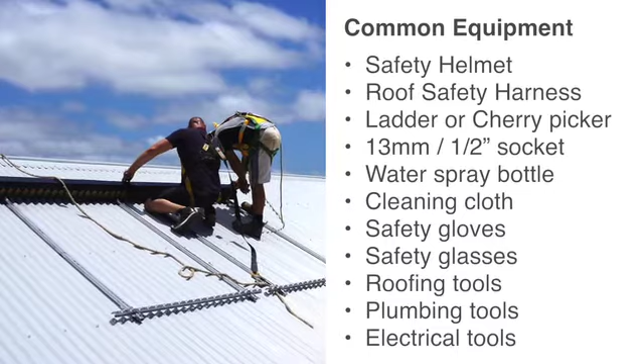Before beginning with the assembly and installation process, make sure you have suitable tools and safety equipment prepared. Some of the equipment you may need includes a safety helmet, roof safety harness, ladder or cherry picker, 13mm or 1/2 inch socket, water spray bottle, cleaning cloth, safety gloves, safety glasses, and standard roofing, plumbing and electrical tools.

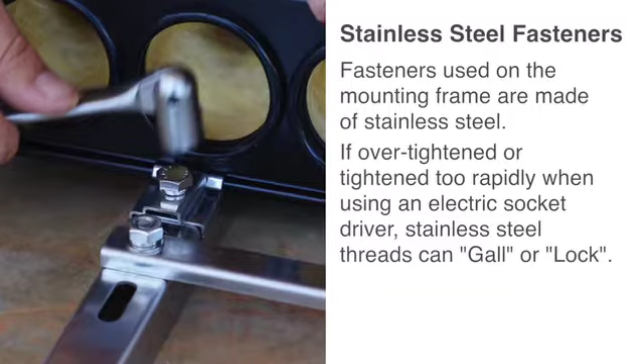Fasteners used on the mounting frames are made from stainless steel. If over-tightened or tightened too rapidly when using an electric socket driver, stainless steel threads can gall or lock. To avoid this happening, only tighten enough to compress the spring washer, which is about one full turn past finger tight. If using an electric socket driver, adjust the torque setting to avoid over-tightening.

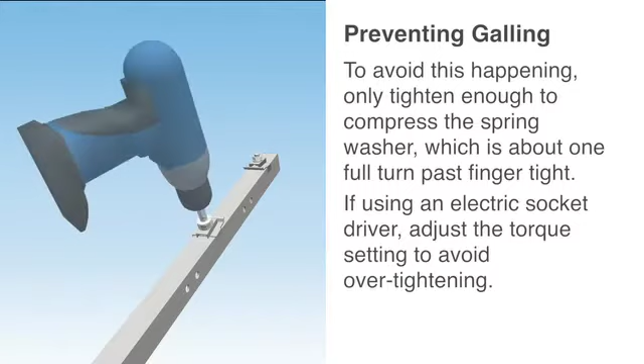The solar collector manifold should ideally be connected to the solar piping and the system flooded with liquid before the evacuated tubes are installed. If evacuated tubes are already installed, only flood when collectors are below water boiling temperature.

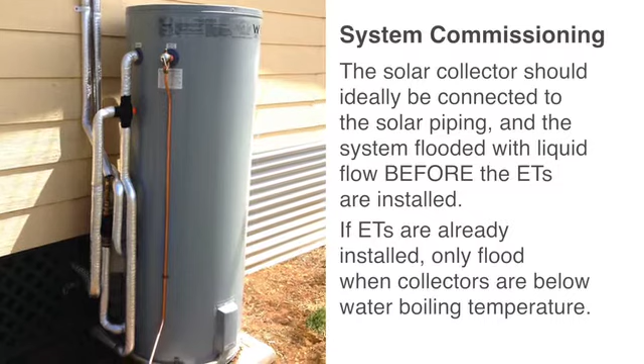Unpacking and inspection. Apricus evacuated tube collectors comprise a number of components that are packed separately.

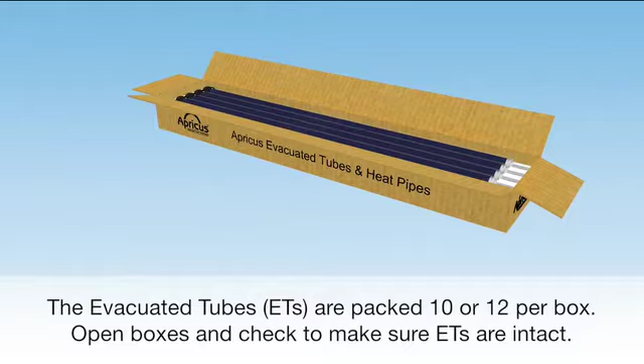The evacuated tubes are packed 10 or 12 per box. Open each box and check to make sure they are all intact. After checking the tubes, close the box to shade them from sunlight. This will prevent them from heating up.

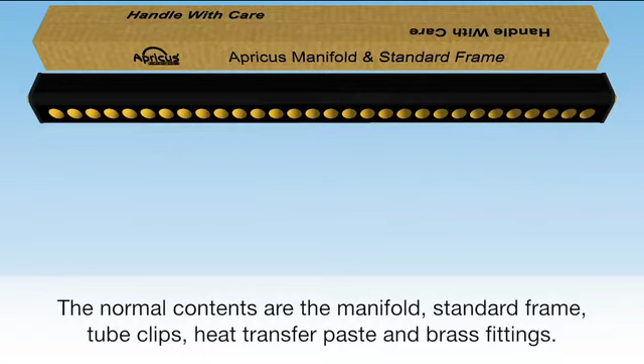The manifold box contents differ based on local market requirements, so check the packing list for details. The normal contents are the manifold, standard frame, tube clips, heat transfer paste, and brass fittings.

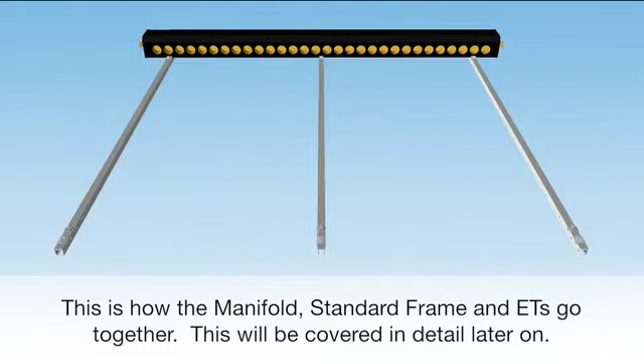This is how the manifold, standard frame, and evacuated tubes go together. This will be covered in detail later on.

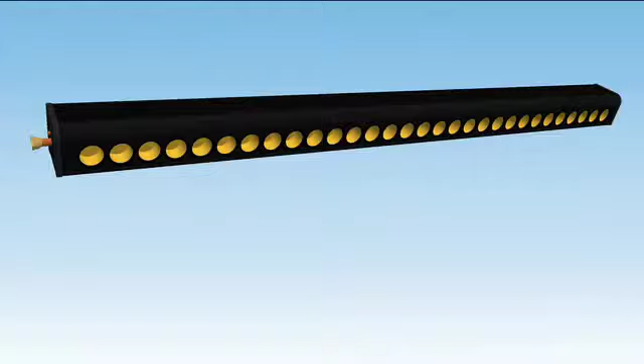Plumbing connection. The inlet-outlet pipes will either be a union nut and male 3/4 inch nipple or smooth copper pipe.

Rubber seals are high temperature rated, but don't point the flame at the manifold casing when brazing or soldering.

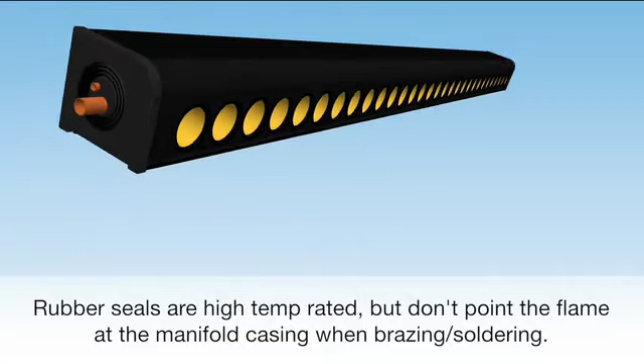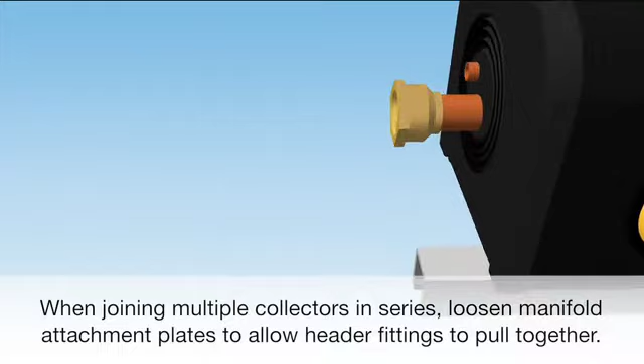When joining multiple collectors in series, loosen manifold attachment plates to allow header fittings to pull together. A maximum of 5 30-tube collectors can be installed in series without a flexible connection.

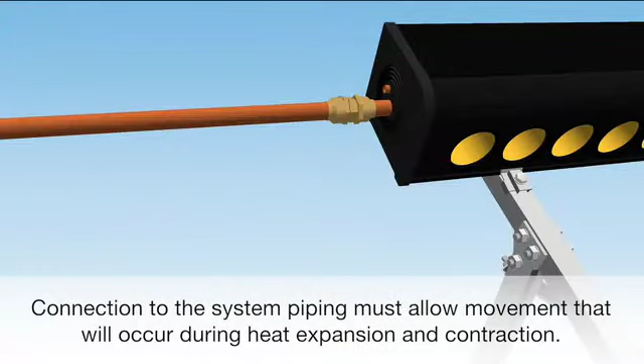Connection to the system piping must allow movement that will occur during heat expansion and contraction. All solar line piping should be insulated to prevent heat loss. Ideally use 25mm or 1 inch or greater wall thickness.

Manifold and standard frame assembly. Please carefully read the displayed information.

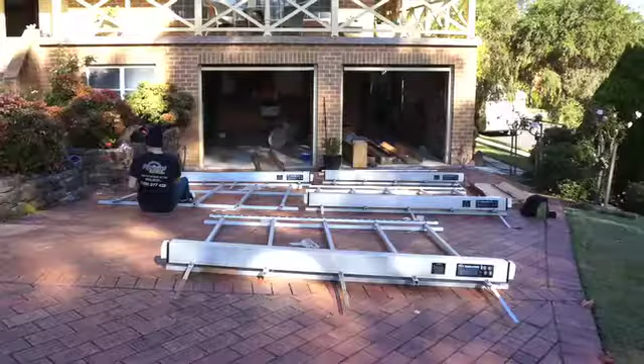The standard frame is provided with every Apricus evacuated tube collector. Additional frame components are added onto this frame. The standard frame and manifold are best assembled at ground level and then carried up onto the roof.

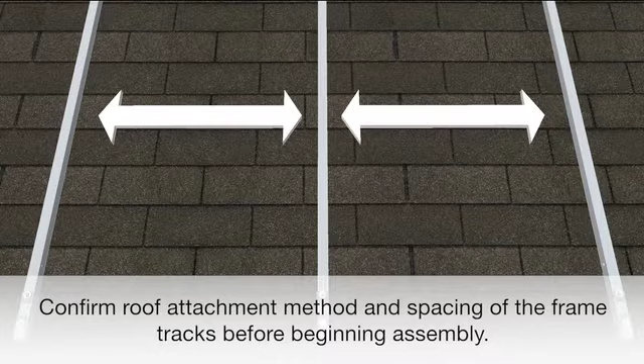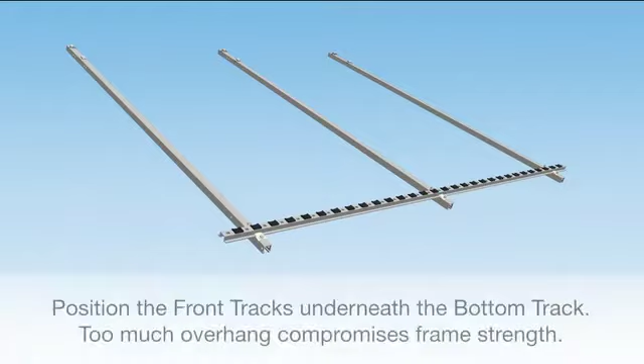Confirm roof attachment method and spacing of the frame tracks before beginning assembly. Lay the front tracks out parallel on the ground. Position the front tracks underneath the bottom track within the correct range. Too much overhang compromises frame strength.

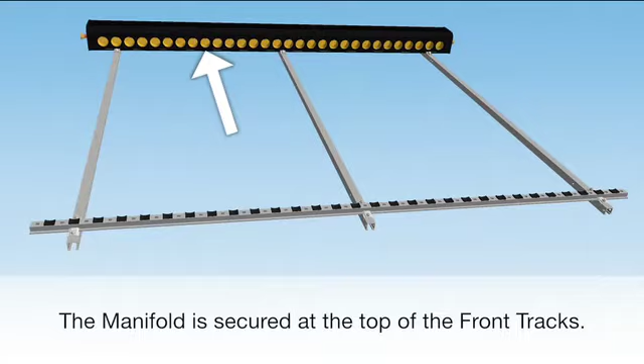The manifold is secured at the top of the front tracks. Loosen off the top attachment plates enough to position the manifold flush against the front tracks. Pull the manifold down, ensuring the plate is deep in the manifold channel.

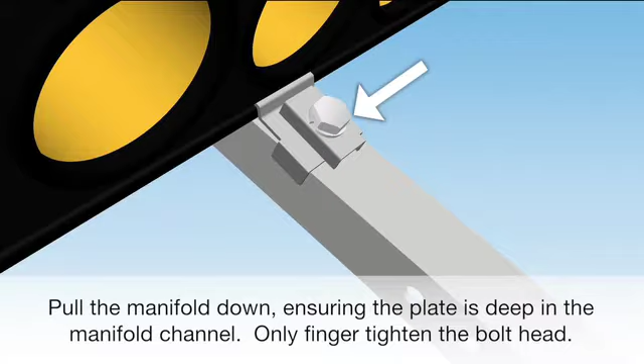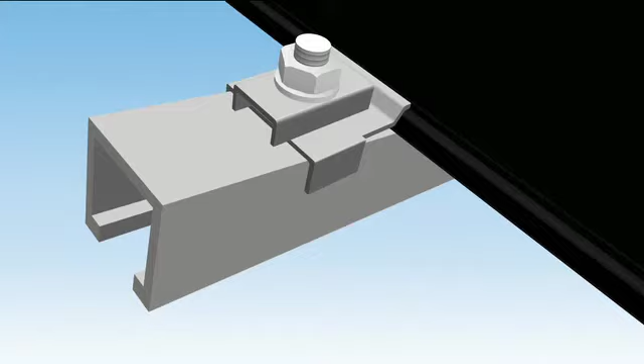Only finger tighten the bolt head. Pull the upper attachment plate down, making sure it is also sitting full depth in the manifold channel. Check to ensure that manifold tube holes and bottom track pads are in alignment.

Depending on the mounting format, additional frame components such as rear legs, U-feet, or roof rails may be used. These can also be assembled at ground level where practical.

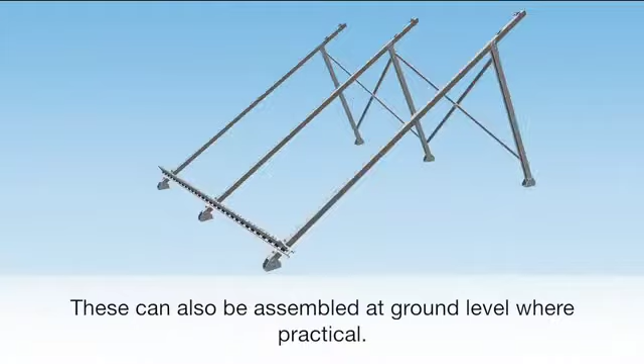Collector mounting overview. Click on a subsection to jump to it.

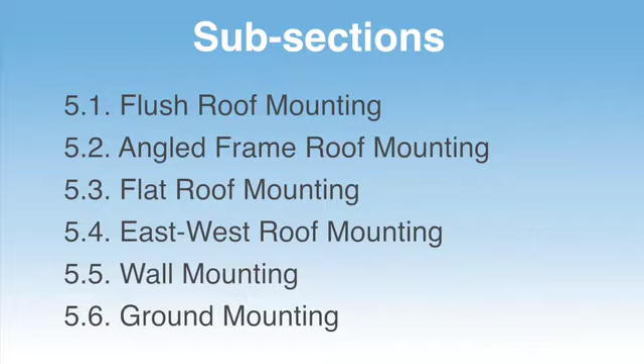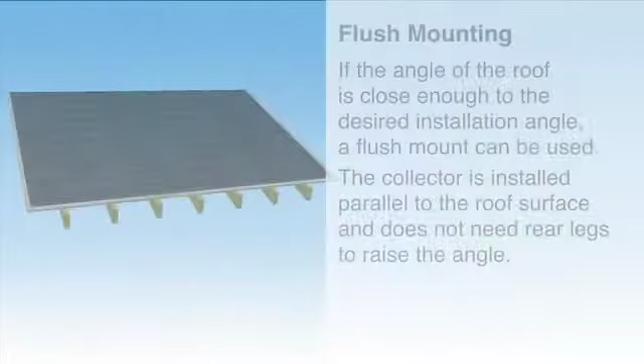Flush roof mounting. If the angle of the roof is close enough to the desired installation angle, a flush mount can be used. The collector is installed parallel to the roof surface and does not need rear legs to raise the angle.

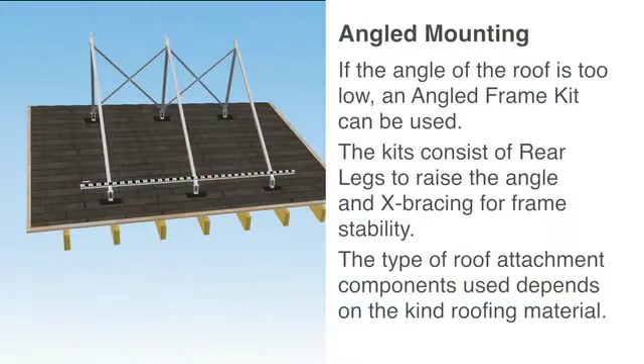Angled frame roof mounting. If the angle of the roof is too low, an angled frame kit can be used to raise the rear of the collector. The kits consist of rear legs and X-bracing for stability. Roof attachment components depend on the roofing material.

Please carefully read the displayed information.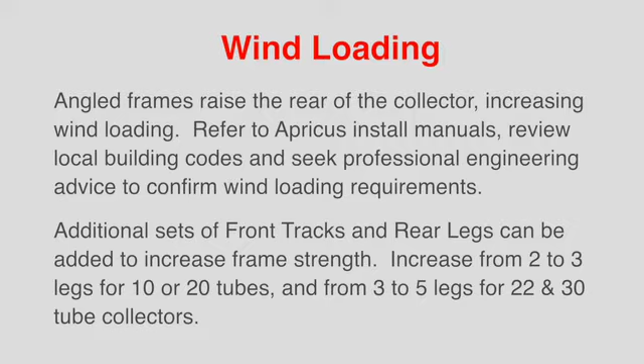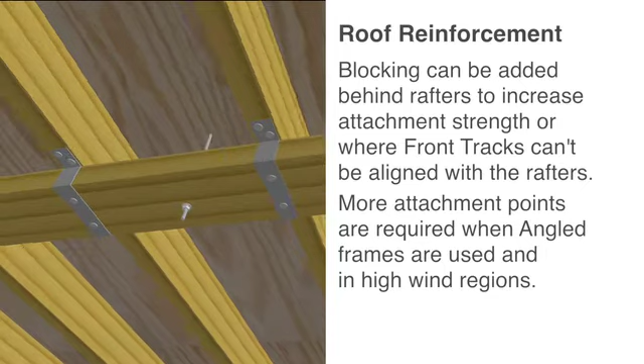Blocking can be added behind rafters to increase attachment strength or where front tracks can't be aligned with the rafters. More attachment points are required when angled frames are used and in high wind regions.

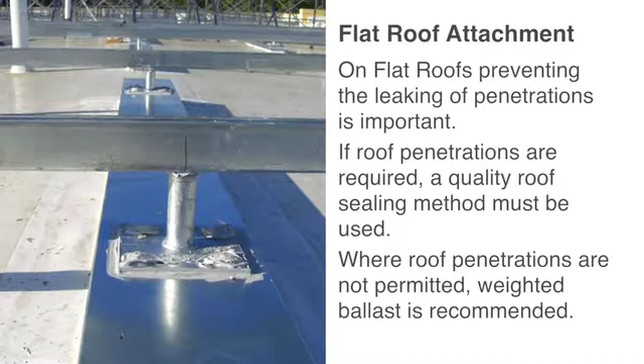Flat roof mounting. On flat roofs, preventing the leaking of penetrations is important. If roof penetrations are required, a quality roof sealing method must be used. Where roof penetrations are not permitted, weighted ballast is recommended.

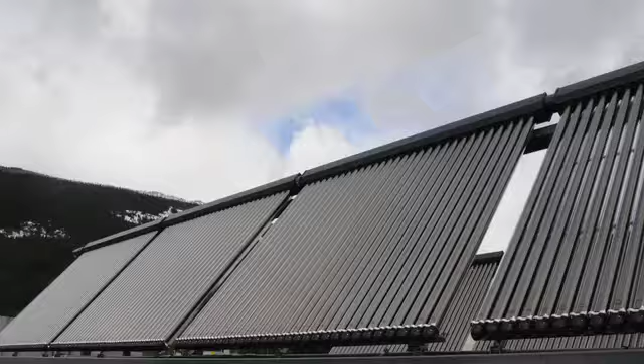If using ballast, the weight must consider wind loading. Normally large concrete blocks are used. More common is building a strong steel structure to which the collector frames are attached.

East-west roof mounting. For north-south aligned roofs, collectors can be mounted along the roof pitch or top of roof to face the midday sun.

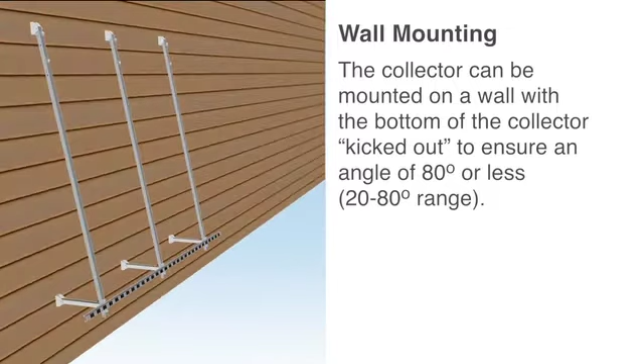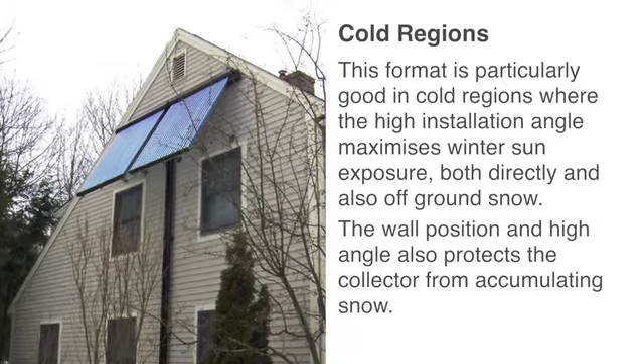Wall mounting. The collector can be mounted on a wall with the bottom of the collector kicked out to ensure an angle of 80 degrees or less. This format is particularly good in cold regions, where the high installation angle maximises winter sun exposure both directly and also off ground snow. The wall position and high angle also protects the collector from accumulating snow.

Ground mounting. If no roof space is available, collectors can be mounted at ground level.

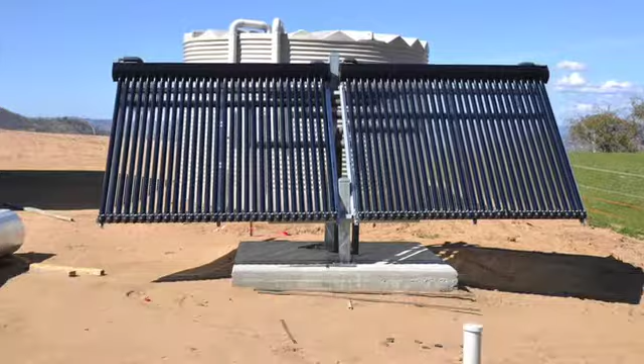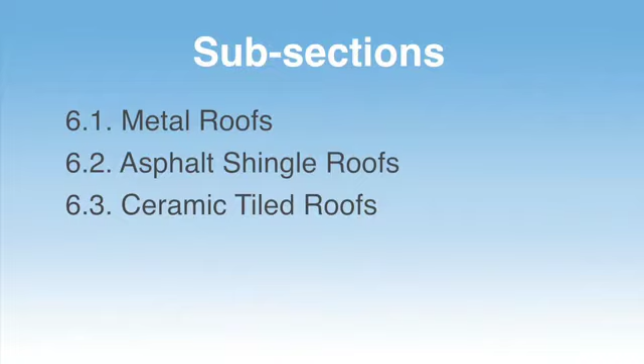Roof material mounting options. Metal roofs.

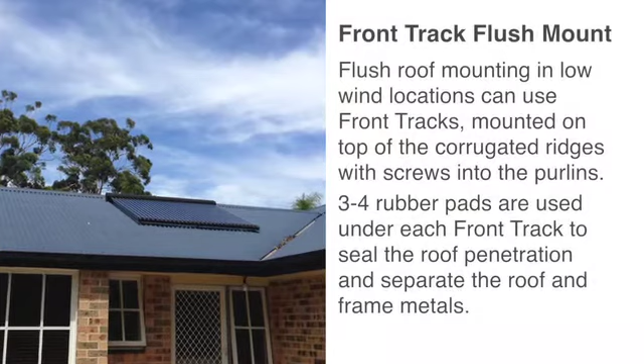Flush roof mounting in low wind locations can use front tracks mounted on top of corrugated ridges with screws into the purlins. 3 to 4 rubber pads are used under each front track to seal the roof penetration and separate the roof and frame metals.

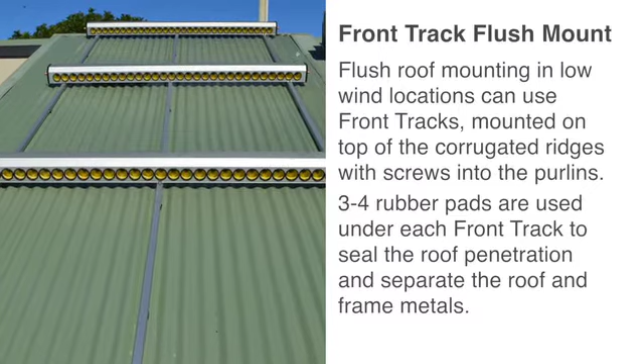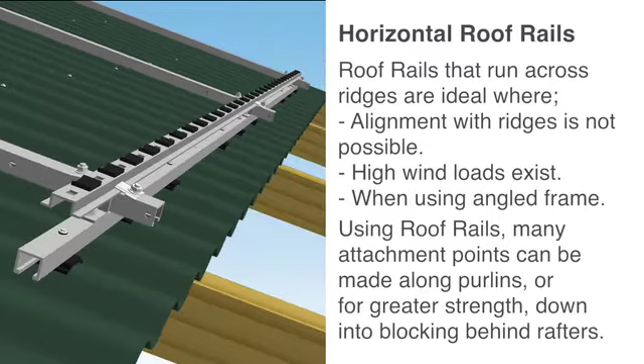Roof rails that run across ridges are ideal where alignment with ridges is not possible, high wind loads exist, or for angled frames. Using roof rails, many attachment points can be made along the purlins, or for greater strength, down into blocking behind rafters. For standing seam roofs, Apricus recommends S-5! clamps.

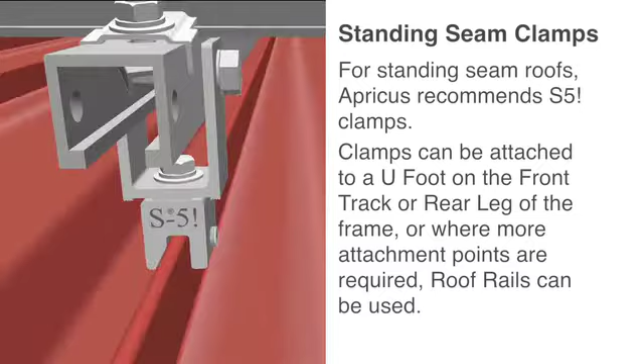Clamps can be attached to a U-foot on the front track or rear leg of the frame, or where more attachment points are required, roof rails can be used.

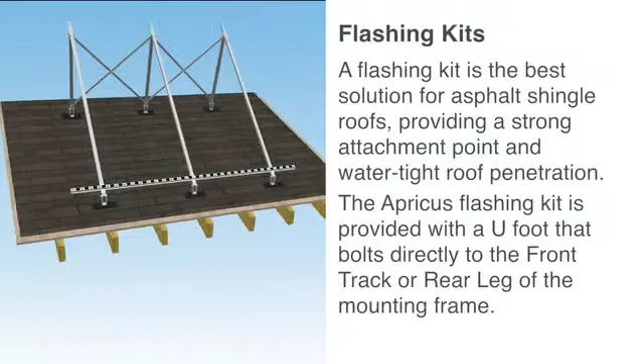Asphalt shingle roofs. A flashing kit is the best solution for asphalt shingle roofs, providing a strong attachment point and watertight roof penetration. The Apricus flashing kit is provided with a U-foot that bolts directly to the front track or rear leg of the mounting frame.

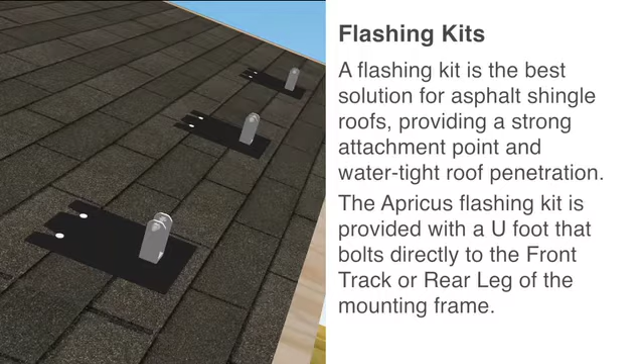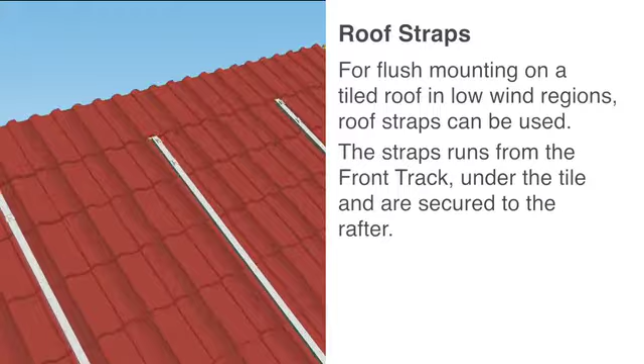Ceramic tiled roofs. For flush mounting on a tiled roof in low wind regions, roof straps can be used. The straps run from the front track under the tile and are secured to the rafter.

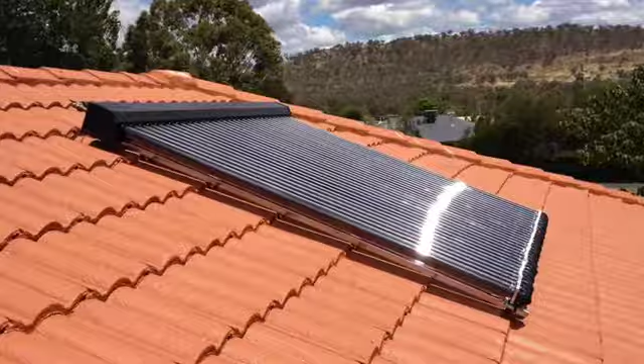In high wind regions or whenever using angled frames, roof hooks should be used as they provide much greater anchoring strength.

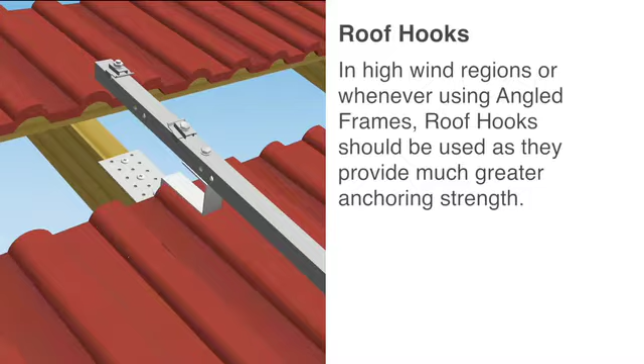Evacuated tube and heat pipe installation. Click on a subsection to jump to it.

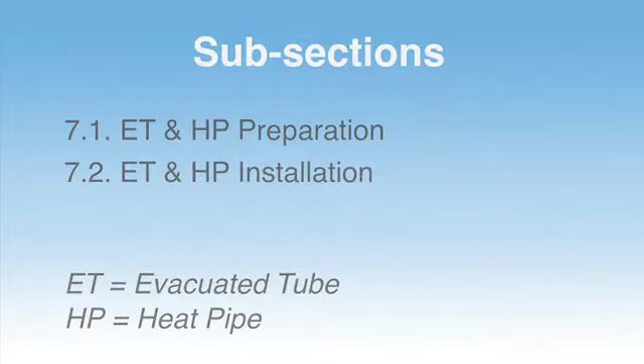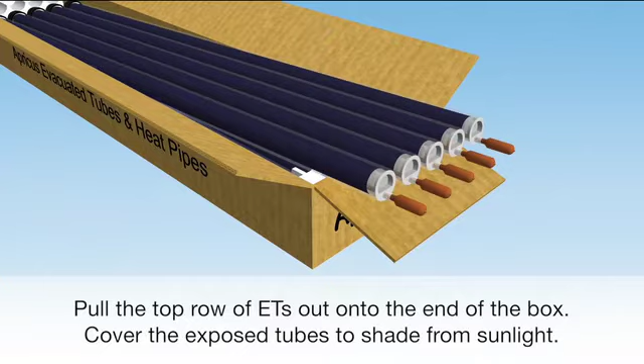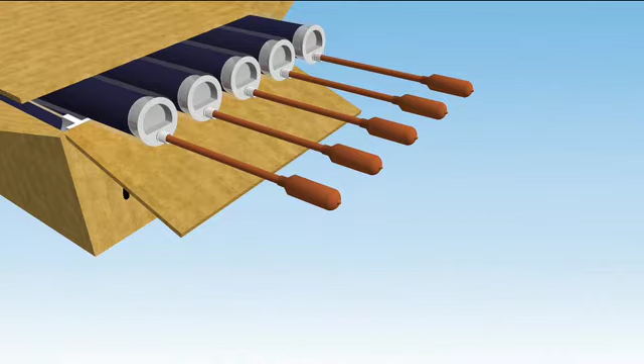Evacuated tube and heat pipe preparation. Pull the top row of evacuated tubes out onto the end of the box. Cover the exposed tubes to shade from sunlight. While holding each top plate in position, pull each heat pipe out by about 20 cm or 8 inches. Squeeze some heat transfer paste into a short length of foam insulation and use to thinly coat each heat pipe.

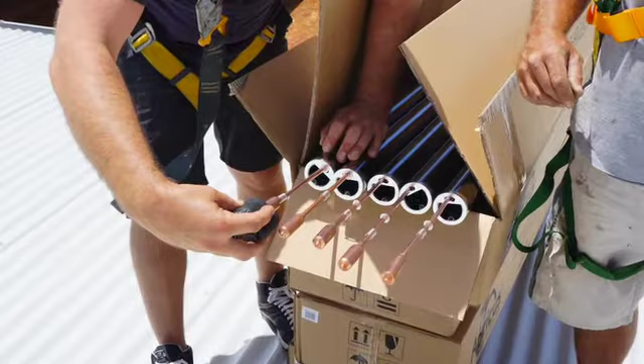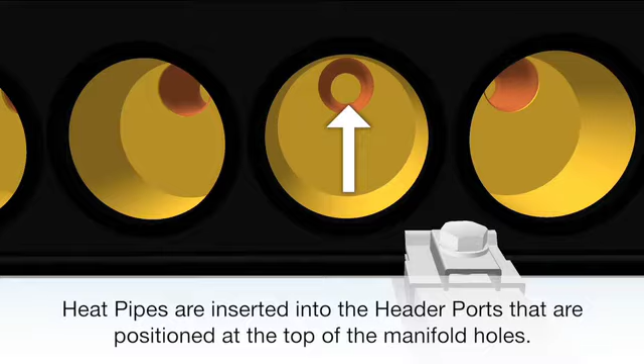Evacuated tube and heat pipe installation. Heat pipes are inserted into the header ports that are positioned at the top of the manifold holes. Insert the heat pipe full depth into the header port, taking care not to bend the heat pipe.

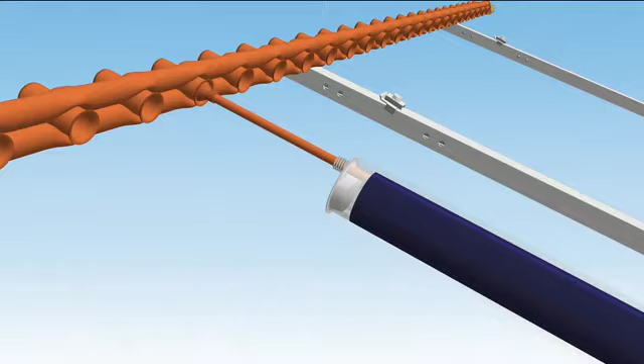To make inserting the evacuated tube easy, spray the outer top of the glass with water. Don't spray inside the tube. Slide the tube up with a slight left-right twist. Push in full depth until the clear tube at the top is no longer visible.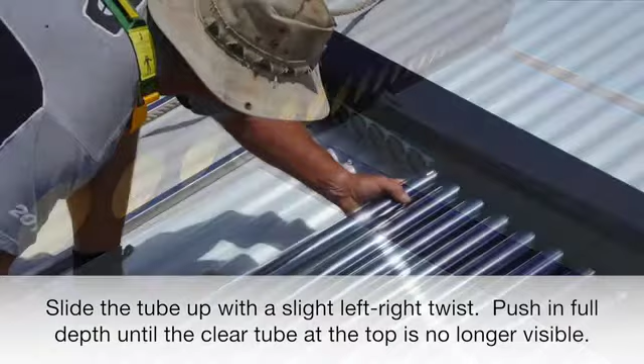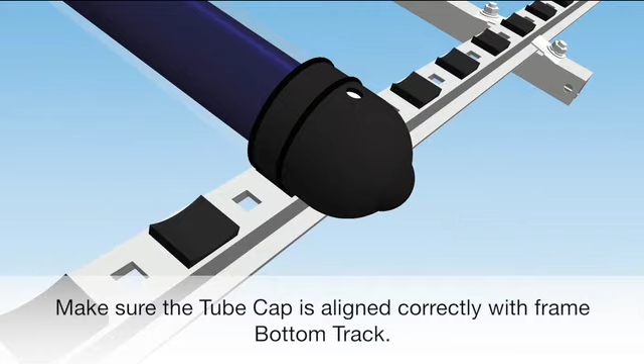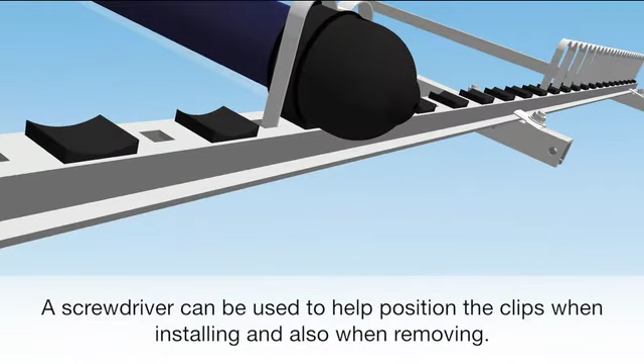Make sure the tube cap is aligned correctly with the bottom track. Secure the evacuated tubes in place with tube clips. Push down one side at a time. A screwdriver can be used to help position the clips when installing and also when removing. Make sure that all evacuated tubes are the same length at the bottom and tube clips are aligned neatly.

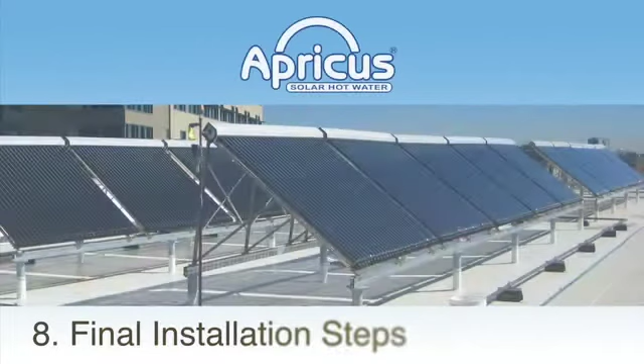Final installation steps. Once the evacuated tubes are installed, in good sunlight the collector should begin to provide heat in 5 to 10 minutes. Check the operation of the controller and circulation pump and complete final system inspection.

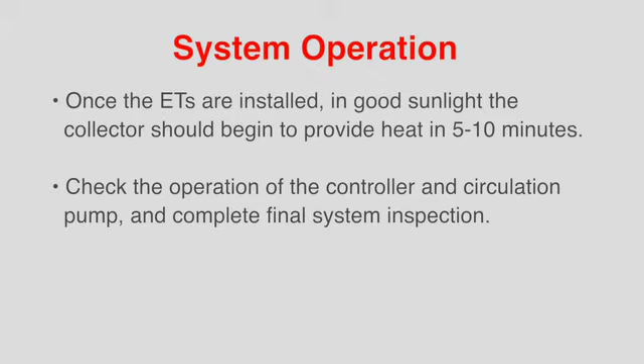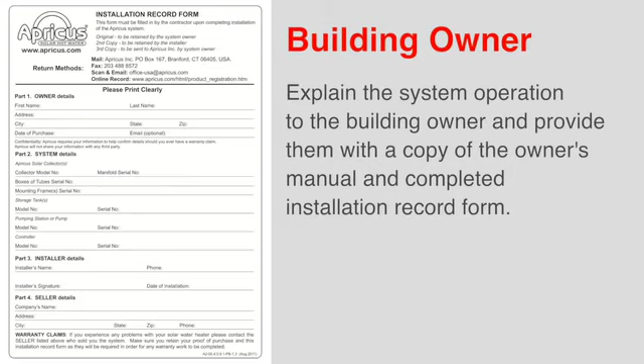Clean the evacuated tubes and manifold casing with window cleaner and a soft cloth. Remove any rubbish from the site. Explain the system operation to the building owner and provide them with a copy of the owner's manual and completed installation record form.